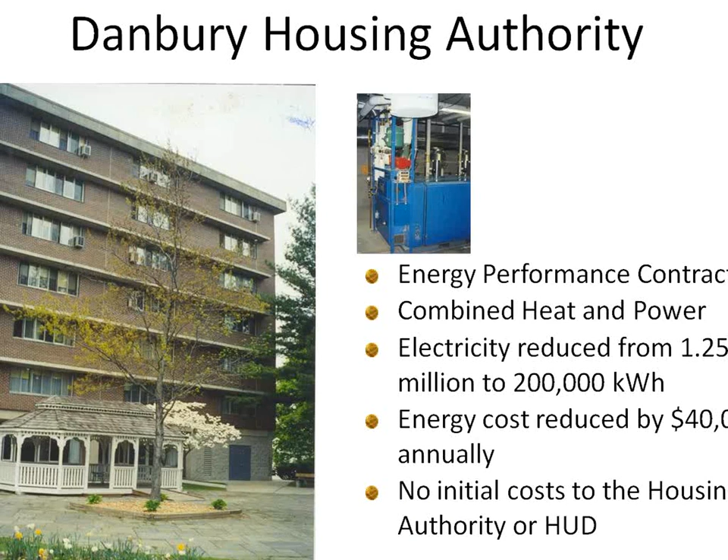So, in addition to these new projects, there's a huge inventory of existing properties, older, medium, or high-rise properties such as this one. This happened to be one of the first combined heat and power projects in Danbury, which is generating about 2/3 of the electricity and about half of the space heating and 100% of its domestic hot water needs. So this is one of the early projects and has been replicated in a number of other projects. Next slide.

And just looking ahead, a couple of things that are on the front burner at this point. We have just launched the Better Buildings Challenge for the multifamily sector, where we have about 50 multifamily portfolio owners representing more than 1 million units of privately owned assisted housing for the most part, who have committed to a 20% reduction in their portfolio over the next 10 years. And we welcome additional participants and volunteers who are interested in joining that campaign. Next slide.

And we are about to launch, as part of the President's Climate Action Plan, the 100 megawatt renewable energy target for federally assisted housing, which is essentially to take the Denver experience and some of the work that's being done through the MASH program in California and replicate that in many other parts of the country. So next slide.

On the sustainable community side, we are actively partnering with EPA as well as DOE and the Department of Transportation to support communities to focus on location-efficient and transit-oriented development, as well as more sustainable growth strategies around the country. Next slide.

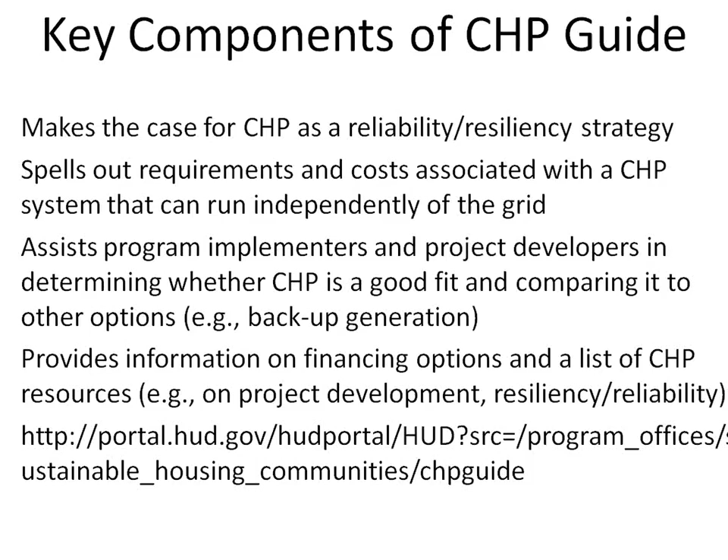So the key components of the guide: it makes the case for CHP as a reliability and a resiliency strategy. It does talk about some of the requirements and costs associated with a CHP system that can run independently of the grid. We do discuss at a relatively high level how developers and program implementers can decide whether CHP is a good fit, as well as comparing it to other options for supplying power, including backup generators. And then we do have a very general section about some financing options. So we encourage you to take a look at the guide. Next slide.

The bottom line is that we do see CHP systems as allowing facilities potentially to remain functional in a disaster area.

We believe that CHP systems can effectively contribute to state and local planning efforts. Fortunately, we have some good partners in the Northeast in the Sandy recovery zones. As I'm sure many of you know, New York City published a plan in June 2013 to improve building and other codes that would enable increased use of CHP for emergency power. New Jersey is addressing this through their energy master plan.

And then we've also seen some good efforts in Texas and Louisiana post-Katrina adopting legislation that critical government buildings must evaluate installing CHP. So the bottom line is that I think there's some positive developments. And at the end of the day, though, we do want to obviously highlight the fact that in order for CHP systems to continue to operate when the grid goes down, these systems have to be specially configured to operate in island mode.

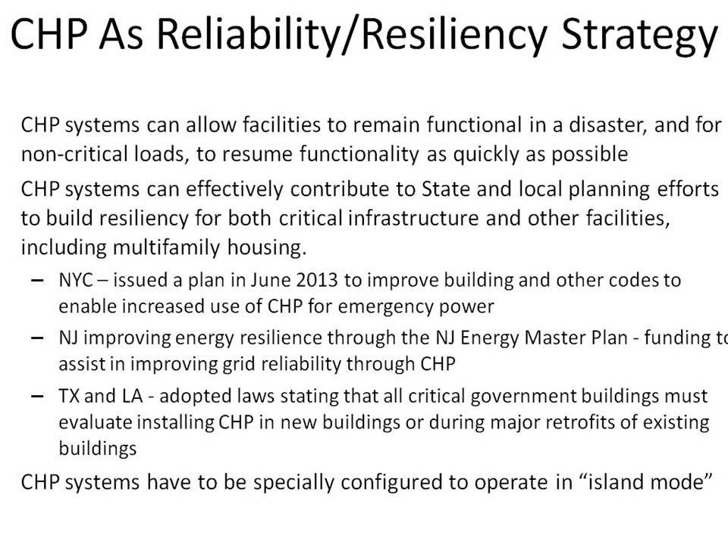So I've probably taken too much time, Bob, already, but if you can take over, we'll go to the next slide. Well, quickly speaking about going into island mode, the guide identifies the components necessary. Michael mentioned black start capability. You have to have a generator capable of operating independently of the grid. It has to have ample capacity to carry the building's key loads, and it has to be set up in a way so that it can disconnect very quickly when the grid goes down. Next.

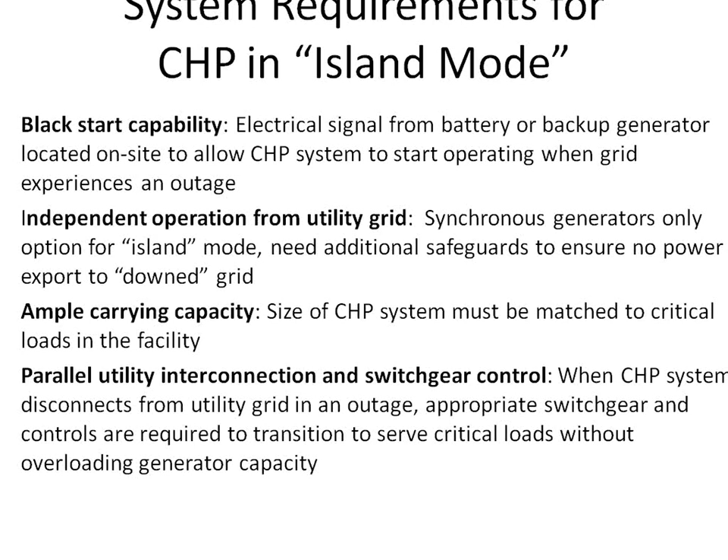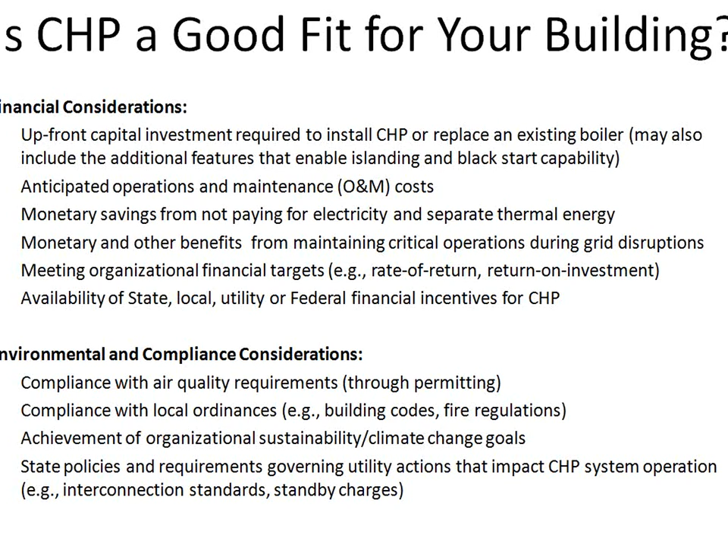The question of whether CHP is a good fit for your building is something that EPA began identifying some years back, and it considers the costs. The payback period varies. From HUD's point of view, public housing can finance with energy performance contracting and go 20 years. A privately owned assisted building might require under 10, and I've heard even lower numbers. But the demonstration of the public benefit of having electricity in a disaster, I think, has identified for us a way of quantifying the value of this additional cost. Next.

When I was working on this to start with, I tapped NYSERDA's early demonstration in New York, and what you will find on footnote 46 in the guide is the HUD page that has several publications, guides that I developed in cooperation with NYSERDA. The first one is aimed at multifamily building owners and managers: what is CHP from their point of view, not necessarily from an engineering point of view. The second deals with a feasibility calculation system

that Oak Ridge Lab developed in response to HUD's request, and it enables a building owner to enter some basic data to determine whether or not it would pay back. Something as simple as monthly utility costs and current utility rates, gas and electricity, and the difference between them. And a building owner can get a fair estimate of payback. That system was developed before the calculations for islanding were identified. And one of the key opportunities here following Sandy is to identify the costs for islanding each of the properties that is identified in the appendix of the guide.

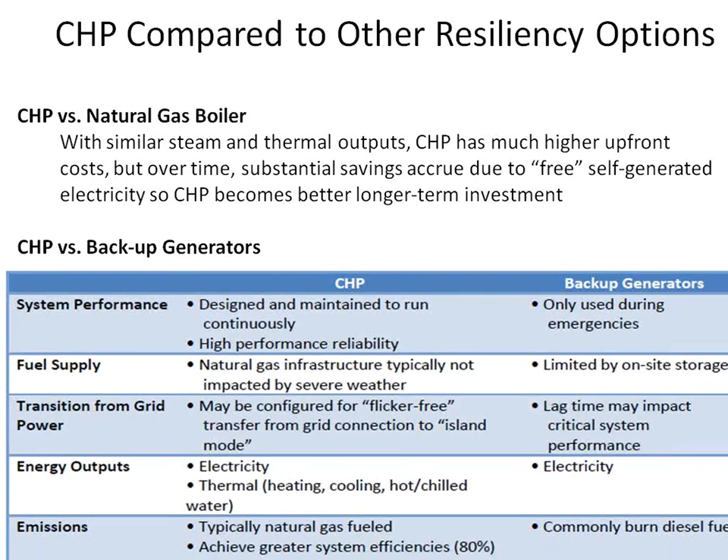There's a checklist in HUD guide number 2 that building owners should look at before they even try to do all the calculations for their monthly costs. Next. There's been a lot of discussion about how expensive it is and whether it would pay to have a backup generator. And one of the problems with backup generators is that they require constant attention during the year to make sure that when they are needed, they will work. And so the experience with them is uneven. Next.

There are 3 examples here of success, and they all survived and operated. The Greenwich Hospital operated for 7 days after the grid went down, and Salem Community College for about 48 hours. The Brevoort is the only one of the 6 multifamily installations identified in the guide, which includes Co-op City. Co-op City's grid did not go down. It has its own special grid and was able to continue generating.

But the Brevoort in Lower Manhattan is an example and has some rather dramatic experience, where the equipment senses a weakening in the grid and has to decide at what point to go black start. And they finally did, and it took about 15 minutes to convert over and repower the building. There are about 700 residents in the building, and they were able to serve as a community resource and bring in neighbors as well as family who needed electricity.

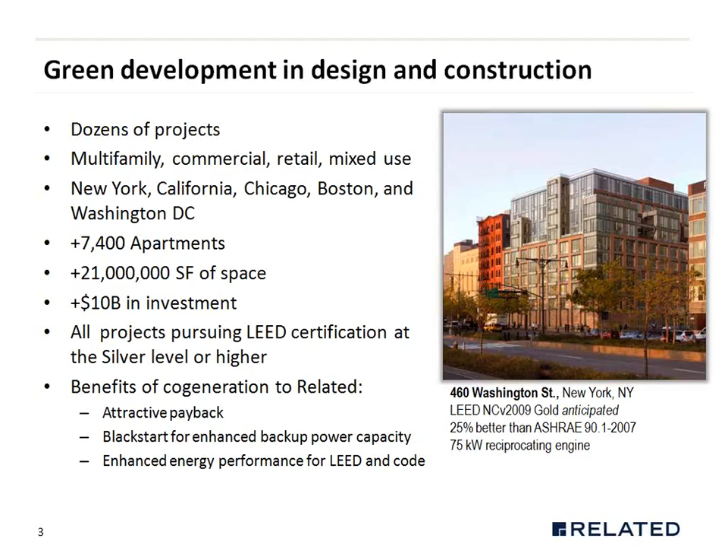And if you see peppered throughout the presentation, I have images, all of which are buildings measured against the newer 2007 version of the code, which is said to be more stringent than the old versions of the code. So our energy performance seems like it's enhanced greatly by not only the cogen, but all of the other energy measures that we bring to bear on the projects.

So what I'm going to talk about is a brief overview so that we're all on the same page about the kind of systems that I'm talking about. I'm going to run through the economics as I see them for a typical multifamily application in New York City. And then, at the end, if you have questions about what it's like with a more commercially oriented facility or not in the city, we can talk about that too. And then some miscellaneous design considerations, permitting, and ways to figure out what incentives are available.

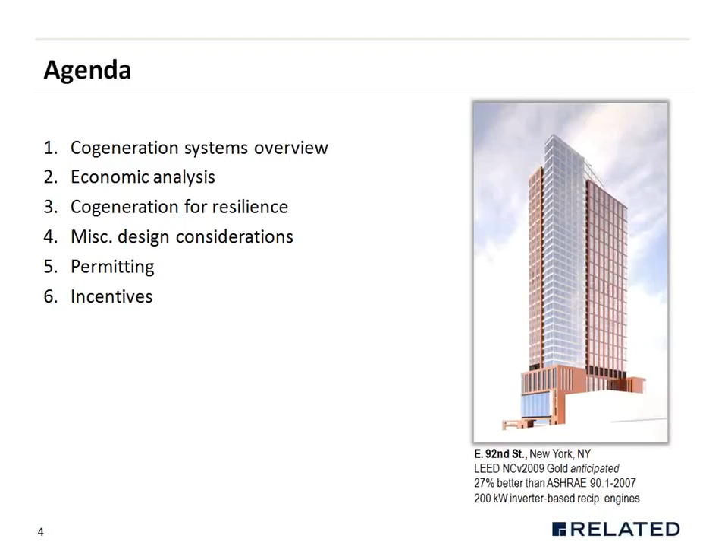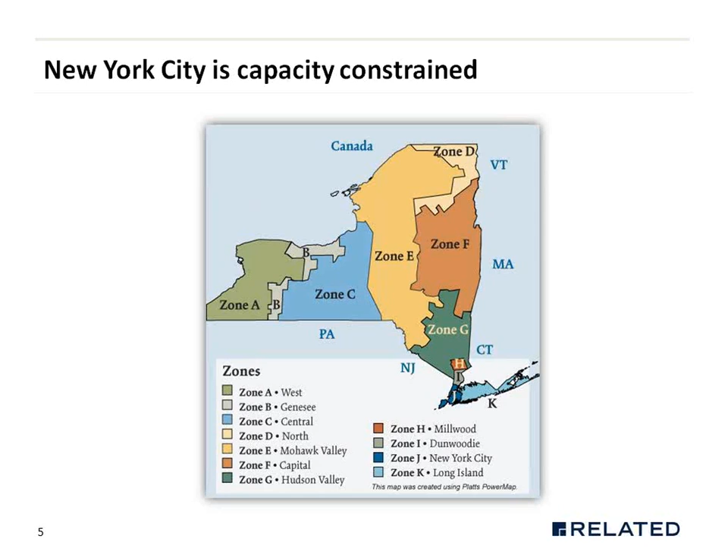The City of New York also has a law on the books that says 80% of the system peak capacity on any given year needs to be generated within the 5 boroughs in order to address that load pocket issue. So reducing system peak through base loaded measures or curtailment is a huge issue in New York City. So cogen does that by removing the base of the peak load profile.

Whereas in a cogen system, and I stole this slide from our hosts today from their website, you get fuel going in, and you have an engine or a turbine, and there's a generator that makes electricity, which is used in the building. So that is roughly equivalent to the efficiency of the generation side of the grid. I mean, a little less so, but roughly equivalent.

But then you've got a series of heat exchangers that take the waste heat and put that heat to some productive use. And these efficiencies are sort of ballpark generalizations, right? There are certain systems that are better, there are certain systems that are worse, but I think that we can all agree that that's about where you're going to land.

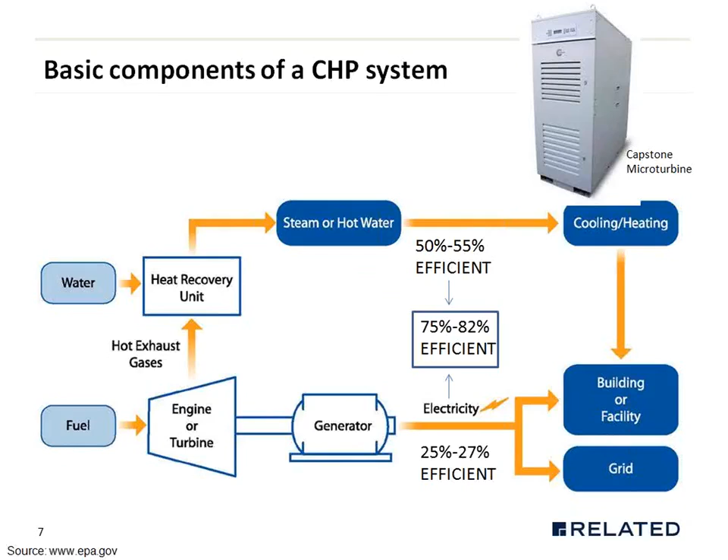I want to be very clear that my remarks today are focused mainly on the type of systems that you'd find in multifamily housing. And in my experience, that means that there are a couple of reciprocating engine vendors out there that have a manufacturing component to them, and a microturbine product that dominate most of the market.

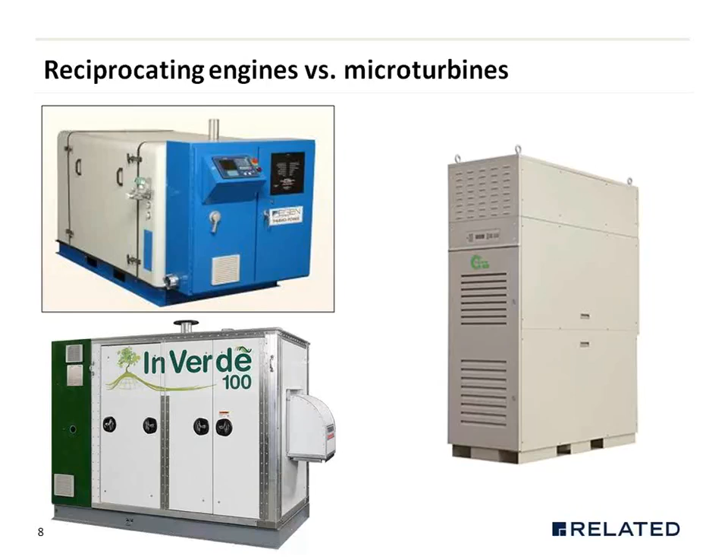Now, you can go and find other products out there, but in my experience, there are a few actors that dominate most of the activity in the market, and they are manufacturers who provide a product and maintenance, and they're sort of like a one-stop for their specific cogen solution.

So let's talk about the design. So the first thing that is most important from an economics perspective and making the system work is that you need to have sufficient electric load in the building to justify having a piece of equipment that is ideally constantly producing a flow of electrons that need to be used productively somewhere.

So the size constraint in most multifamily is that there's a direct metering configuration with the utility where there's one big meter for the house account, which all of the load for the base building lands, including elevators, corridor lighting, pumps and motors, maybe a cooling tower depending on the heating and cooling system configuration, all the fans for ventilation, and all the miscellaneous plug load for the common area.

All of the apartments typically, not always, but typically have a direct metered connection to the utilities. So their refrigerator, lights, and plug load are all running off their own little utility meter. If that's the case, then the opportunity to deploy cogen in that building is going to be much more constrained relative to a scenario where all of the electric load in the entire building is falling on a single meter.

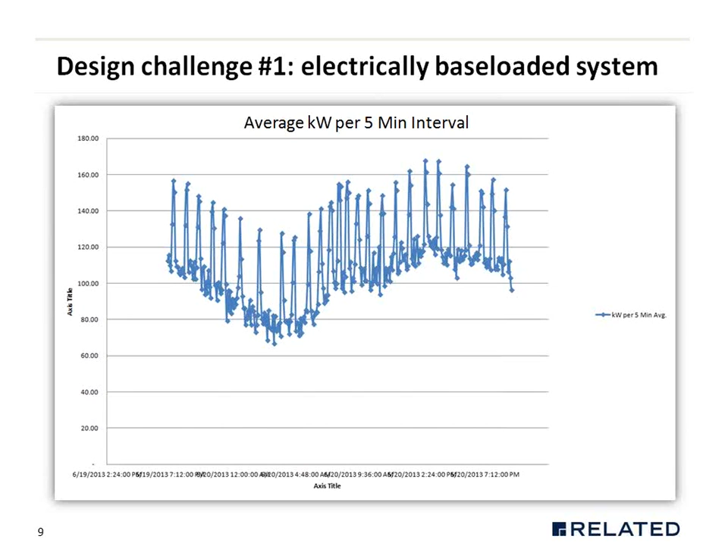And in new construction, you need to just really pay attention to what you think you're going to be at, and then I like to be very conservative relative to that analysis because it's great if a cogen project outperforms your projection, and it's always a real unfortunate circumstance when they fall short of your expectation.

The other element to doing a proper sizing is making sure that there is use for the heat output, because if you're in New York, maybe you can generate a kWh for 13 cents, or maybe it's about 15 cents, but you can buy from the grid for 18 cents, so you're making a spread on all of the kWhs that you generate. If you relied on that spread, you would have a very, very long payback. It's only the ability to capture the waste heat and use it productively that gives the cogen system its payback.

And I think that when you talk to the design engineering community, in my experience, there is an impulse to oversize the domestic water system.

So when you look at the nameplate of your domestic water system, it might lead you to the understanding that you have more of a domestic water load than you actually do. And so it's important to do the BTU metering or some pre-retrofit M&V to ensure that you actually do have the thermal load.

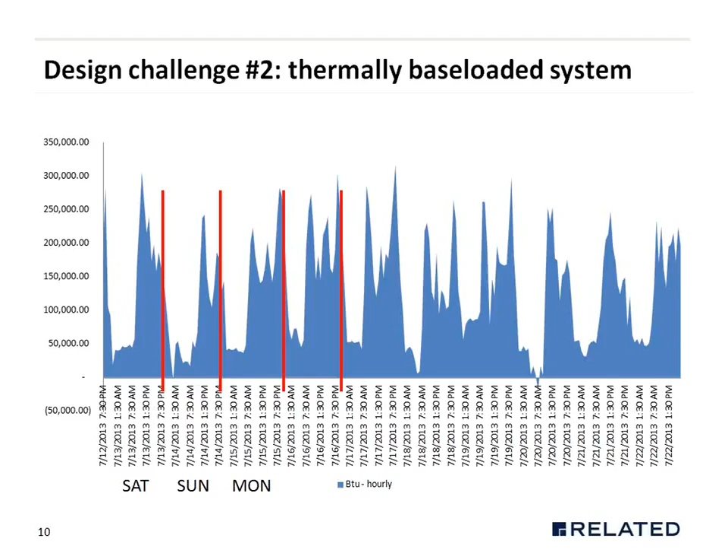So the approximate economics of cogen in New York City, now there's a couple of caveats here. I tried to develop what I would think of as a relatively general rule of thumb type analysis for the presentation. These installed costs can go up or down depending on your level of sophistication. I didn't use our actual installed costs because I don't know that it would necessarily be representative for the entire field. Anyway, this is the way I look at it.

You look at your kWh output, you look at how much usable thermal output you get, how much of that thermal output you're able to recover and use, how much you think you're going to dump over the course of a year, and what your gas input is relative to this energy output. Then you factor in your maintenance cost. These numbers, the thermal utilization is driven by how much is being dumped, so that's correlated to these percentages used. And then you have your installed cost, and given the cost of electricity that you're offsetting and given the cost of gas that you're offsetting by not having to use your boiler, you can figure out what your annual savings are net of maintenance, and you can figure out the payback from there.

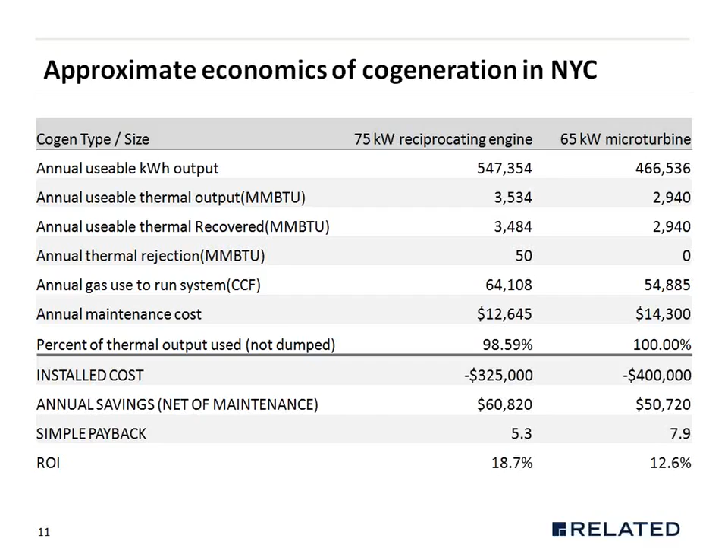I think this is fairly representative. If we have questions about specific elements of this at the end of the presentation, we can flip back to it. I guess one of the questions would be, if the typical recip has a better payback than a typical microturbine, then why would you use a microturbine? And I think that I'll speak to that later on in the presentation.

So one thing that I wanted to spend a lot of time on was this question of how does cogen play into a resilience strategy. It's been a very interesting experience having been working for a developer through the experience of Superstorm Sandy. We had a couple of projects in design and one that was already going into the ground when that happened. And we've done a lot to future-proof our buildings against a flood scenario. I don't want to get into everything that we're doing, but cogen and the ability to have on-site power is certainly part of the discussion.

Now, in New York City, I can speak to how it is here. It might not be the same sort of scenario all across the country in that New York has two different codes that apply to buildings seeking to install backup generators. One is that if your building is greater than 125 feet tall, you're required to have a backup generator. And it needs to serve three primary loads.

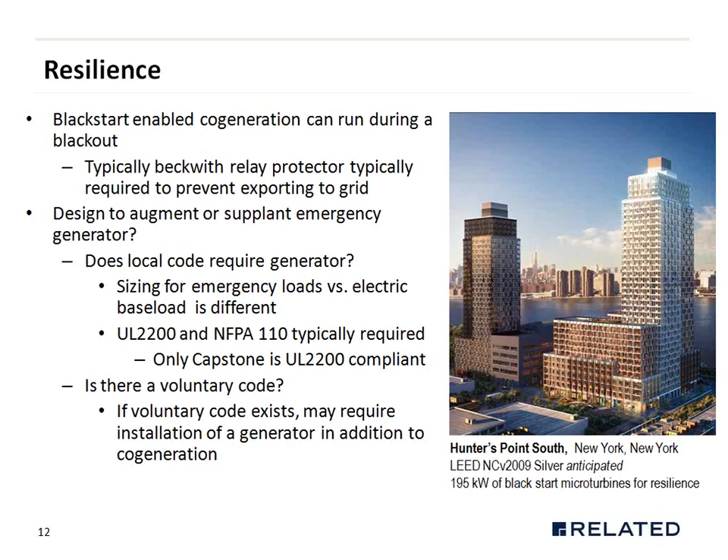And so before, when I was talking about why would you use a microturbine over a recip, the reason is the microturbine carries a certification that allows you to have black start, to have that functionality, to comply with code. If you're able to size it in such a way, you could supplement your emergency, you could completely eliminate your emergency generator altogether. The last thing I'll say about it is that all of the systems that I've used that have black start and can run when the grid goes down are inverter based. So just keep that in mind.

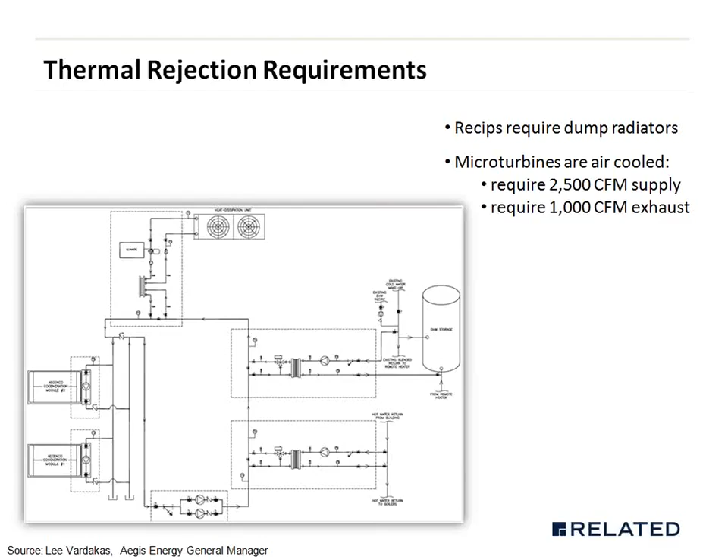One reason that you'd want to use a microturbine instead of a recip as well is the thermal rejection requirements. The recips tend to have a slightly more fussy design where you need dump radiators and a glycol loop running from the system, and the radiators can be loud and they need outdoor space. So if you're space constrained, the microturbines are air-cooled, and so they don't need a dump radiator. However, you need to supply and exhaust a large volume of air to the space containing the microturbine. So neither of them are without requirement, but one may jive with your project requirements better than the other.

One of the things I want to mention is that we spent a long time trying to figure out if the cogen and a boiler plant could share a flue, and what if it was a condensing boiler, because condensing boilers have acidic flue gases, and you need a certain alloy, but maybe the cogen exhaust was of a high temperature and wouldn't work with the alloy. It turns out that we were able to solve that. You can do it.

In New York City, you need a letter from the cogen manufacturer and the boiler manufacturer that they can share a flue. They just need to be configured in such a way that neither of the pieces of equipment is going to present back pressure issues that make the units fail. So you need to put them in the right order as you go out the building.

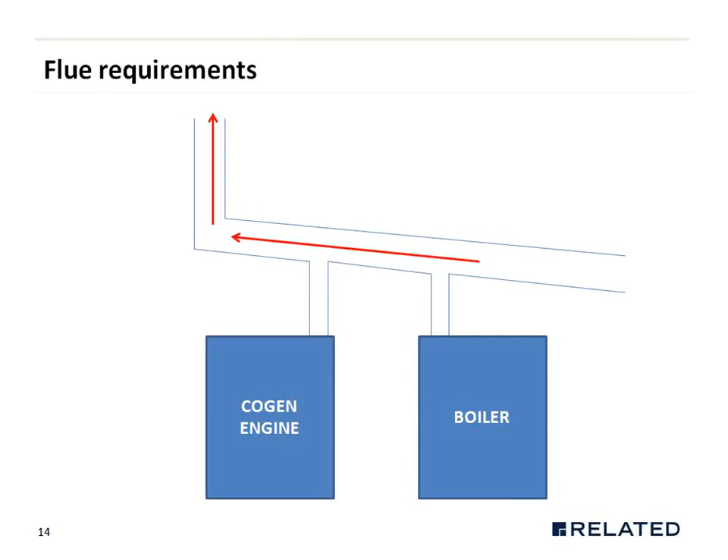In New York City, there's a bunch of documentation about how to successfully navigate the regulatory superstructure that wants to regulate cogen. The fire department gets involved, Department of Buildings gets involved, DEP from an air quality perspective gets involved sometimes. And then there's the interconnection with the utility, which is something that you're going to have to consider.

I didn't even talk about tariff implications or rate impacts, primarily because the systems that I'm talking about, at least in New York, meet an efficiency requirement which exempts you from having to go on a standby rate. But if you're using an inefficient cogen, or you're subject to the standby rate regardless of the equipment that you're choosing, that is a super important thing to pay attention to.

And finally, I'm going to say that if you want to find incentives to help pay for this stuff, EPA has a really great database that they update on a biweekly basis, where you can search for all of the incentive programs and grants and loans and other germane documentation to help guide your effort.